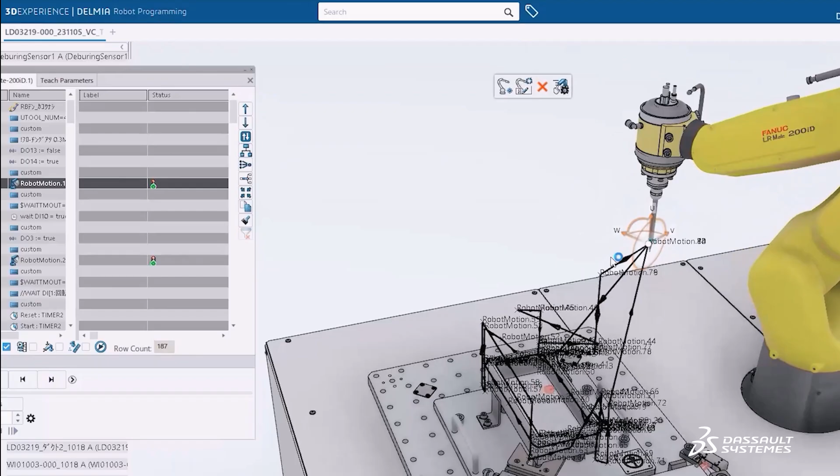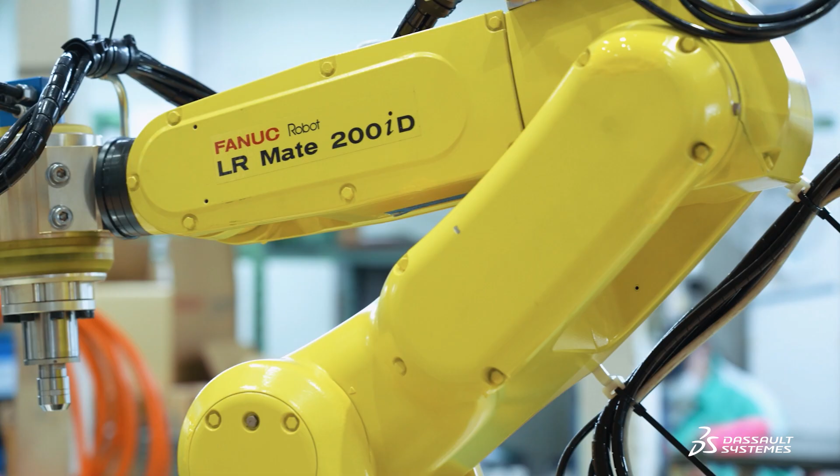Precision, speed, quality. These are what Yutaka Electronics is known for as a trusted expert in robotic production line building, whether for automotive original equipment manufacturers or aerospace and defense firms.

Our company was founded in 1964, based on mechatronics technology. In 1979, we were among the first in Japan to enter the industrial robot system field, and we've been active as a total system integrator ever since.

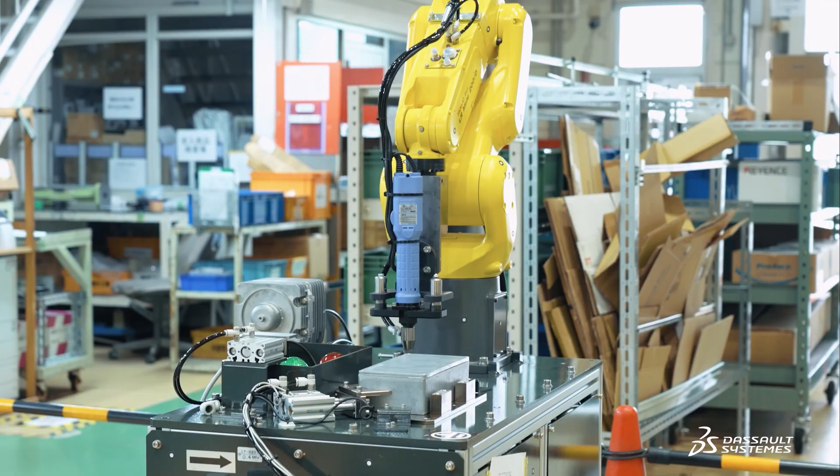Yutaka now does virtual commissioning on the 3D Experience platform on the cloud to test and verify the components of its customers' robotic production lines before actual line building.

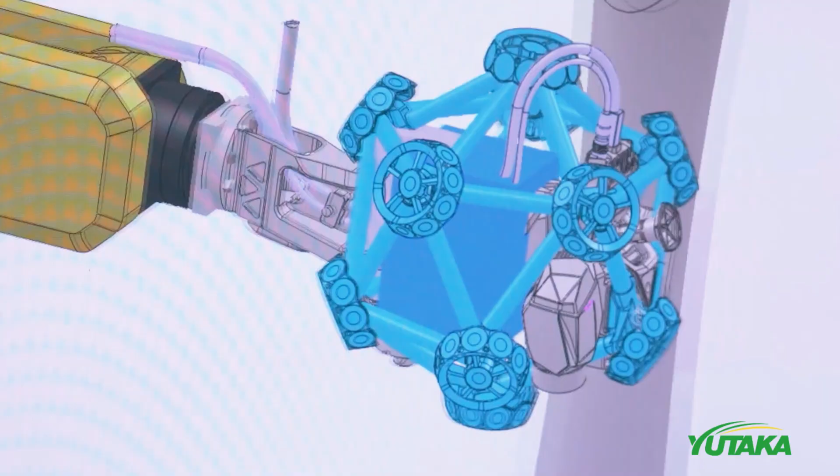The platform allows Yutaka to pre-verify feasibility and assess the appropriate takt time. This reduced physical testing and shortened prototyping lead times by 50%.

Before, robot simulations only included robot movements, but now we can also monitor actuator movements, and in this case, AGV, automated guided vehicle movements.

It is a great advantage to be able to see the movement so easily in 3D and virtually.

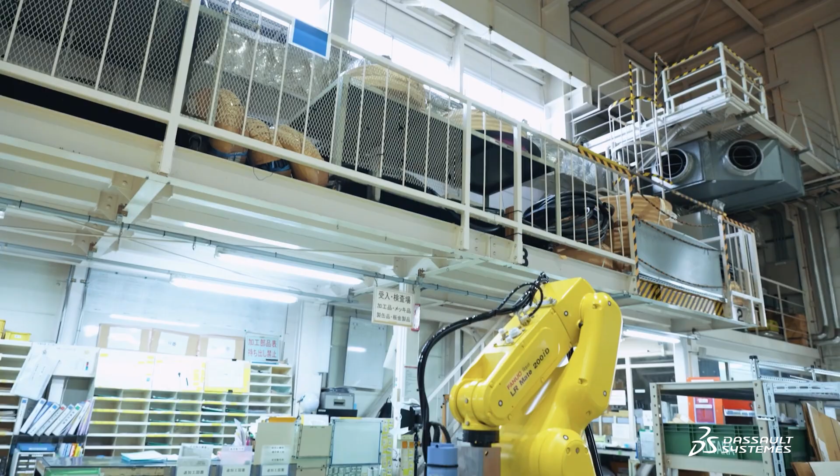With the cloud-based 3D Experience platform, Yutaka can share data with customers for fast and easy collaboration.

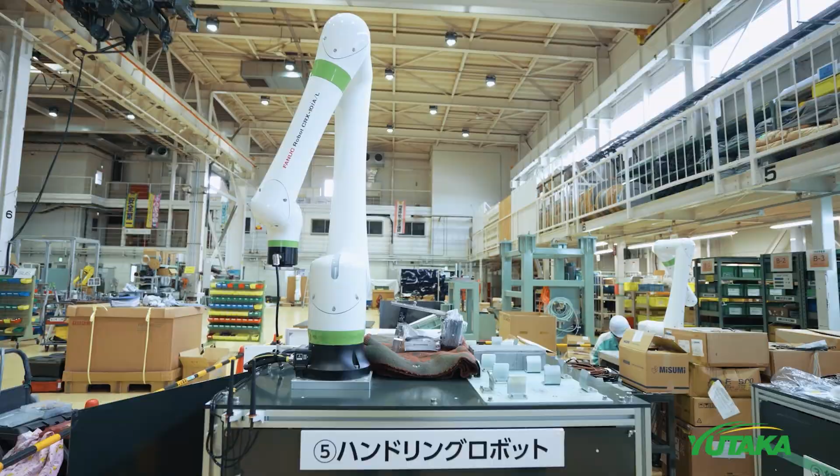As a system integrator, we can combine the latest technologies from around the world to provide added value that doesn't exist elsewhere. We aim to continue doing this in the future.